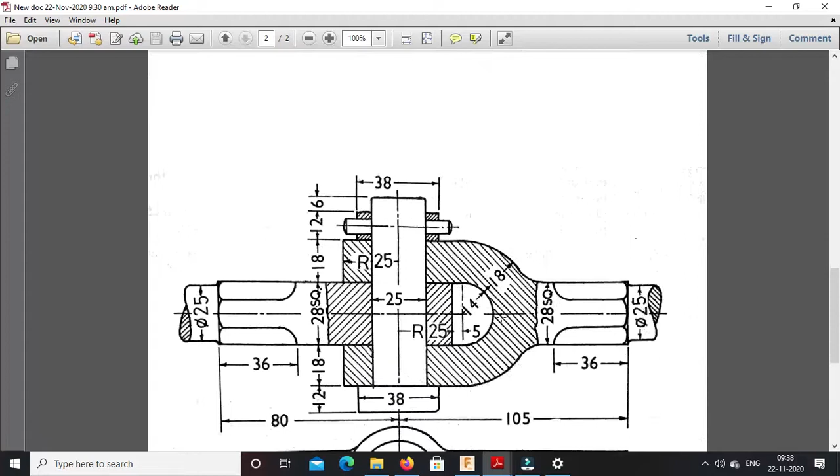Now the next part is the knuckle joint. These are the parts of the knuckle joint. Three-dimensional parts are there in isometric view, and this one is the assembly. So for what purpose is this knuckle joint used? Whenever two rods are having axial load along them and you want to connect them together, this kind of knuckle joint can be used.

This is one end of the shaft, called the fork end. This one is the other end of the shaft or rod, called the eye end. If we want to connect these two ends together, we insert this eye end in between the fork end, then insert this pin through the common hole, and then we lock this pin using this collar and pin arrangement.

We will insert first the collar over here, and then we will insert this taper pin through the common hole provided in the collar and pin. So the final assembly will look like this. This is the sectional front view and this is the top view of the assembly.

Now the advantage is that whenever we join two ends of the rod using this knuckle joint, angular movement is possible. That means if this rod is fixed, this rod along with the joint can move in an angular motion. If you observe a tractor, the engine or front part of the tractor is joined with the back side, called the trolley, and to connect them this kind of knuckle joint is used.

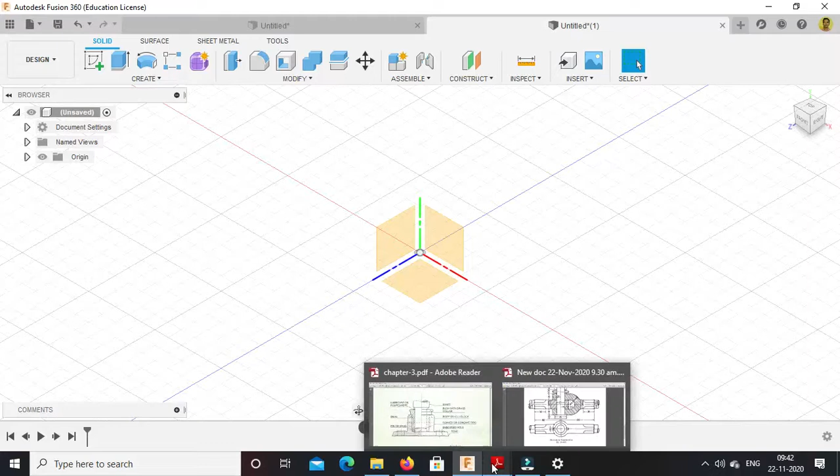First we will go to Fusion 360 and try to make the same orientation as the drawing. On the horizontal plane, we will draw this cross section, these two circles and thickness, and then extrude it. So go to Fusion 360, select this horizontal plane, and create sketch.

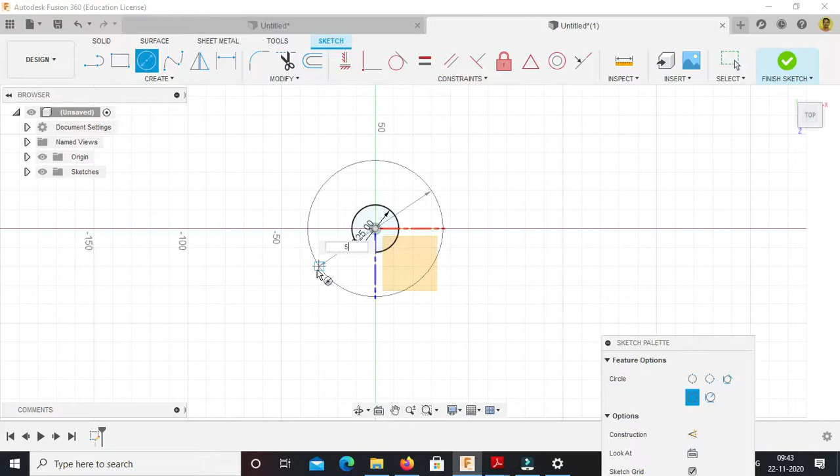Now we will draw two circles, first of diameter 25, enter, then radius 25, that means diameter is 50. Press enter. Correct. So this central circle is 25 and this R25, that means diameter is 50.

Okay, and then we need to draw this line, that means square. So this is the square, so we will draw two lines for 28 square.

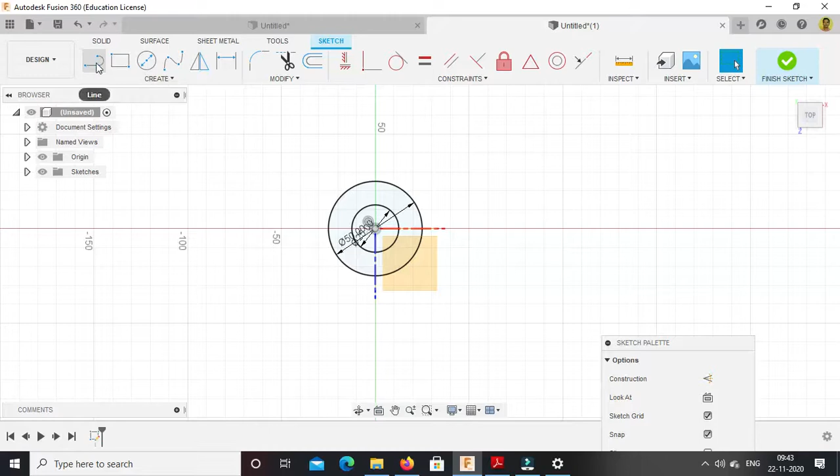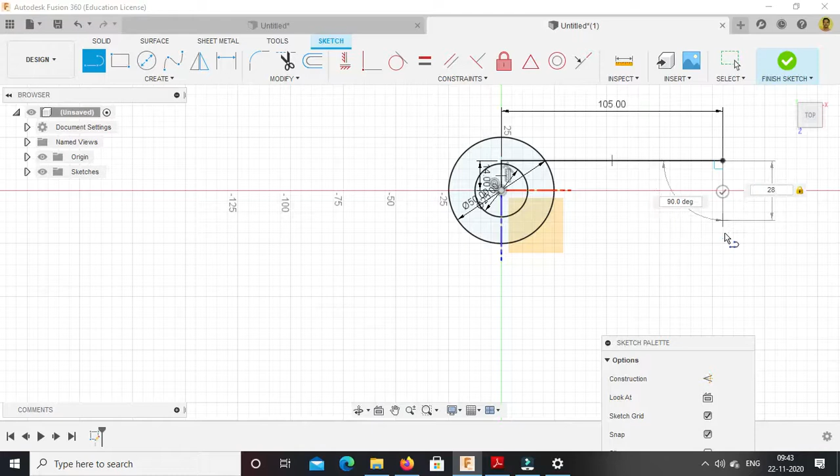So just take line command, start from this side, go to this 14, enter, then length is 105. If you remember, I have already shown you 105, then again 28, and then again we will come back to original position.

Now we will trim this remaining part. This is not required, this is also not required, this portion is also not required, and this is not required. Okay, finish this sketch.

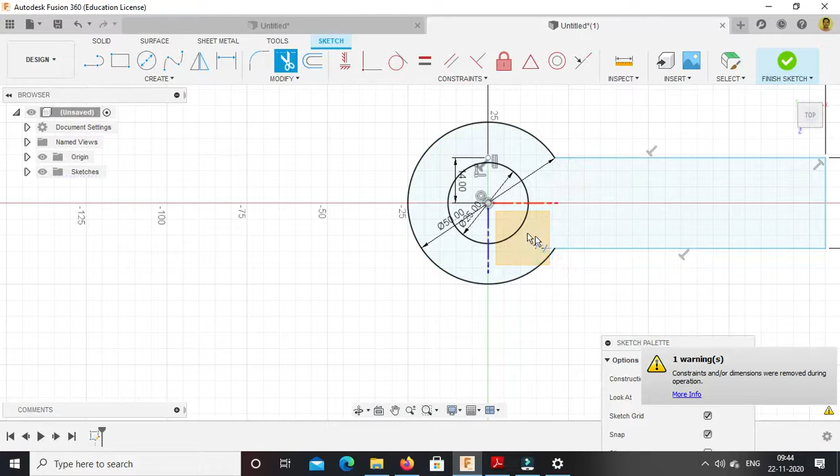Now this cross section we have drawn. Now for extruding, what is the total height of this part for this fork end? So from this point to this point. This 18 plus 18, so it is 36, and 36 plus 28. So it is total 64.

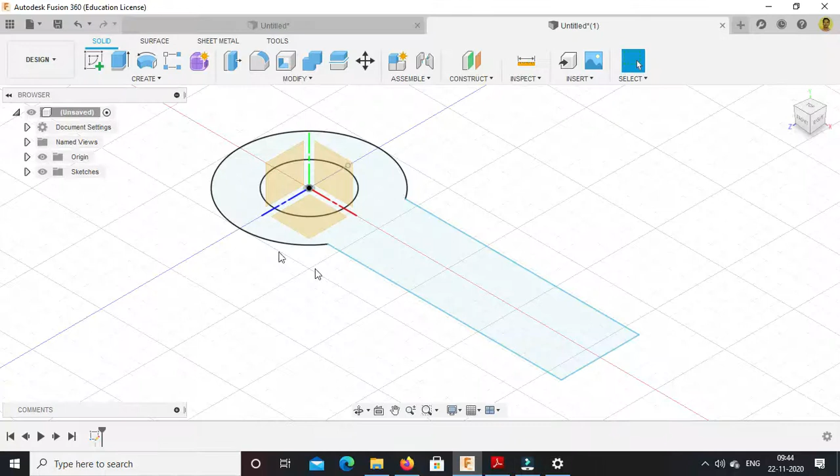So we will extrude it by 64 distance. Extrude, select this, enter the distance as 64, press enter. Now first of all we will remove this extra material over here because we want this end to be of 28 square only.

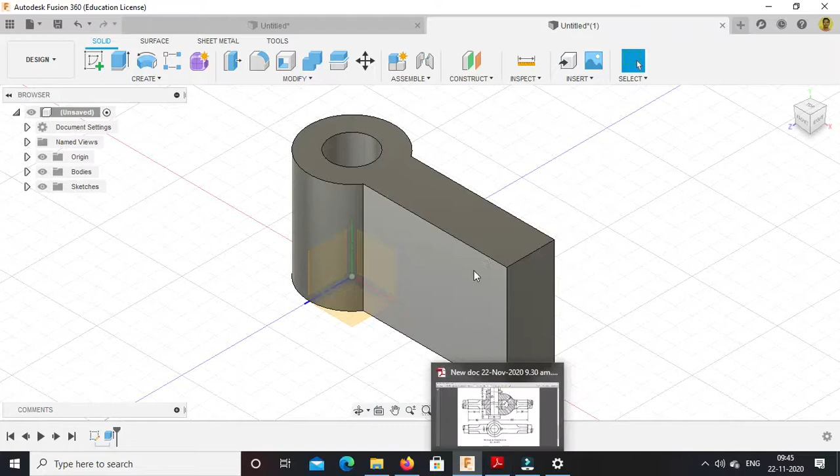So we need to select this plane, right click on it, go to create sketch option. Now how the cross section is, this is the circular portion.

So here it is a circular portion, and how the center is located, this 25 plus 5. So total from this center it is at 30. And this 14 plus 18, so how much is the radius? 18 plus 14 is 32.

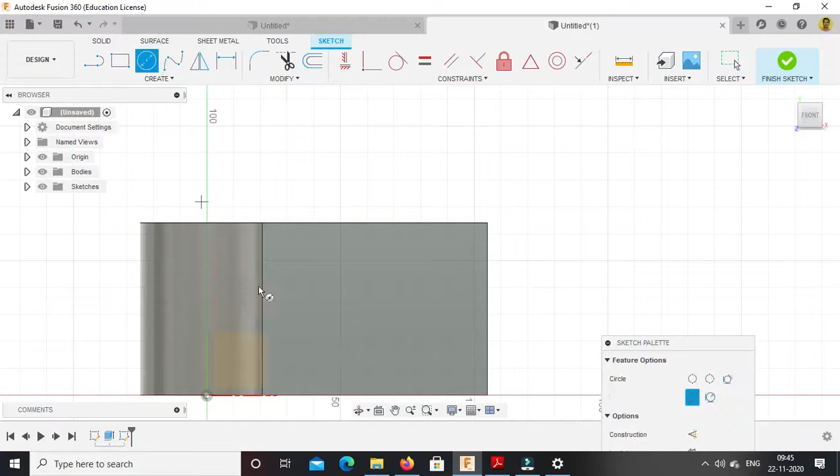So diameter is 64. So at the distance of, from this center, at the distance of 30, we will draw one circle of diameter 64. And then we will draw this center line. So again go to this, just draw one circle over here of diameter 64,

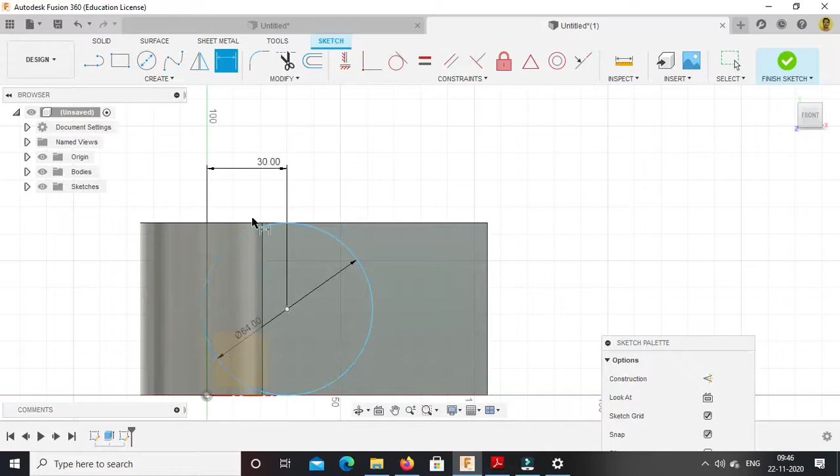Press enter. Now we will dimension from this center point to this, it should be 30, exactly 30, press enter. And we will check it whether it is symmetric or not. This should be 32, so it is 32.

Okay, now we will draw again lines from this point to 14, then we will go like this, again 28, and then we will come back to position.

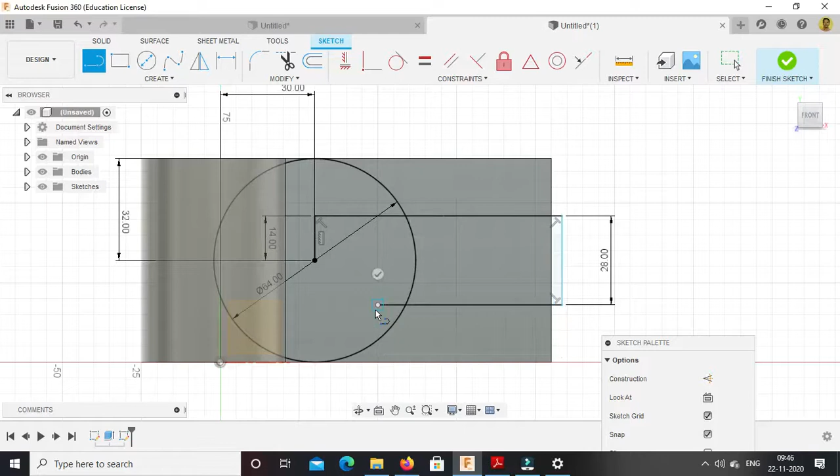Again using trim command we will remove the in between part. Now finish this sketch mode, finish the sketch mode. Now we want to remove this material.

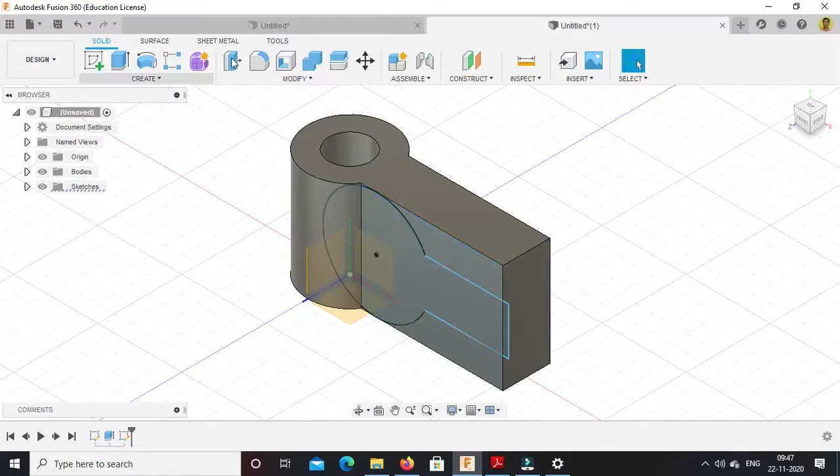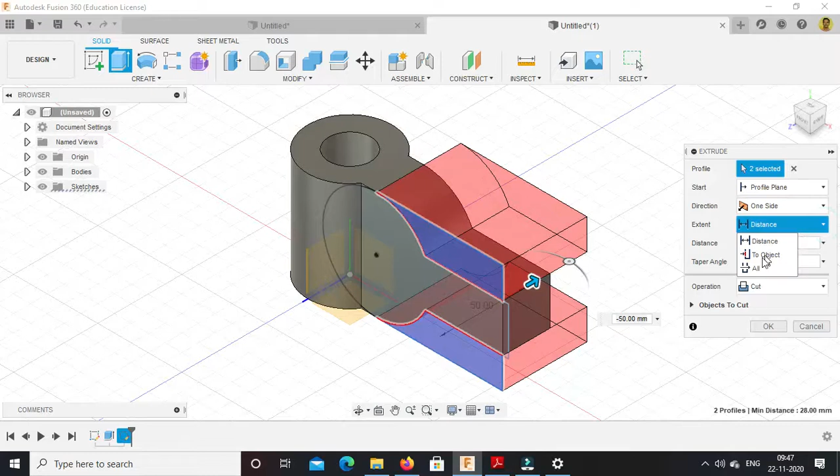So this part, so go to again extrude, select this one and this one, make operation as a cut because we want to remove the material. The direction should be, again keep it as it is, and distance should be all. So it will remove the material, press OK.

So we have got this. Now we want to remove the central material, so for that purpose just go to center plane, this plane we will select, right click on it, go to create sketch option.

Now for preparing this part, what is required, how are the dimensions? So this thickness is 28, for which we want to remove the material. First of all we want to draw one rectangle of this 25, plus 5, so 30 is there. And on this side also we will keep it as 30. Then height is 28 and this half circle of the radius 14. And it should be at the center.

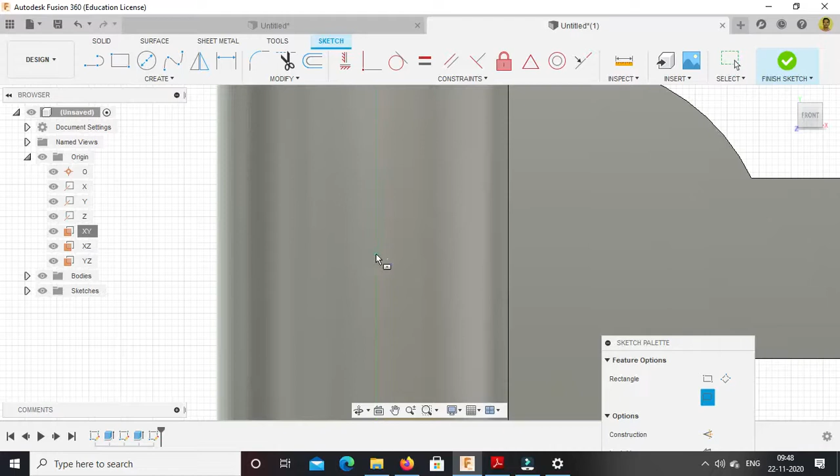So for that purpose just go to it, draw a center rectangle, center rectangle. Just give the height as 28, press tab, width should be 60,

Press enter. Then again we will keep it at the center. So from this center distance should be 32 because total height is 64. Press enter, and already we have drawn it at the center, so no need to measure from this point to this point or this point to this point.

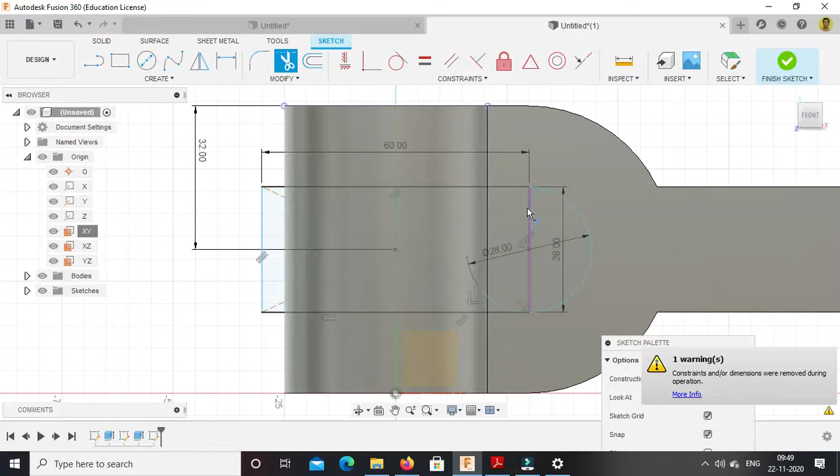So we will draw one half circle over here of diameter 28. Again we will remove the material or unwanted portion of sketch. Finish this sketch mode.

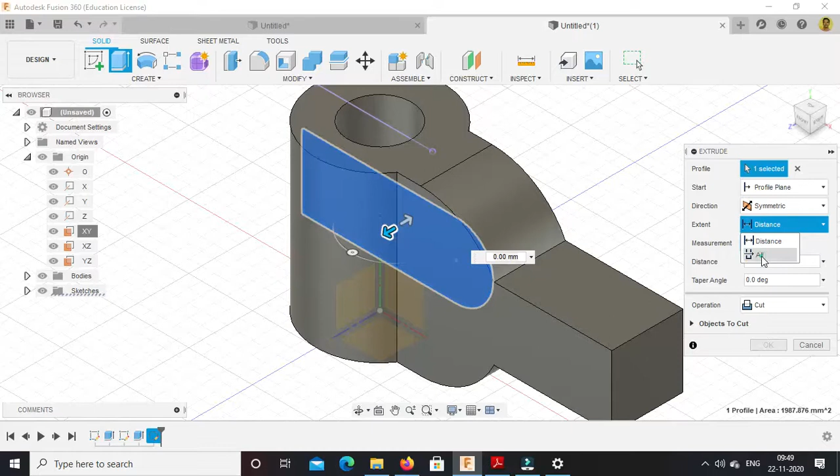Now again go to extrude, select this central part. Now this time direction should be symmetric because on both the sides we want to remove the material. Cut, and distance should be all. Press OK.

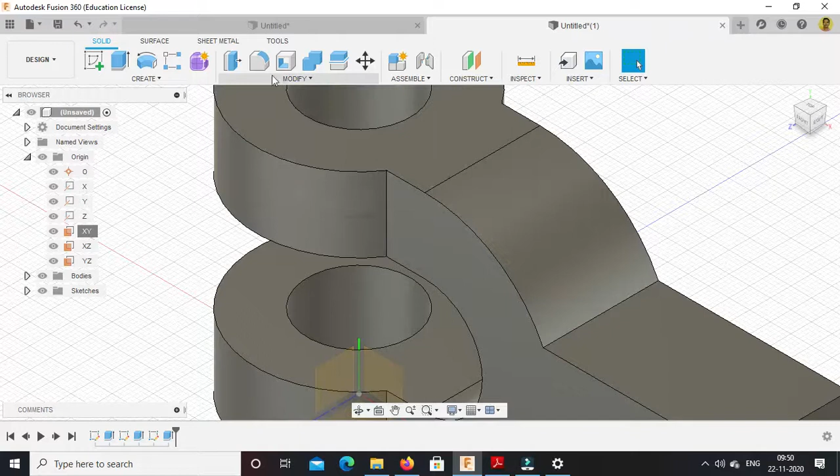So we have prepared this part. If you observe, similar to the initial one. Just for rounding purpose we will provide fillet over here because these edges are sharp. So for that purpose go to fillet, select these edges. First of all we will select all the edges that we want to fillet.

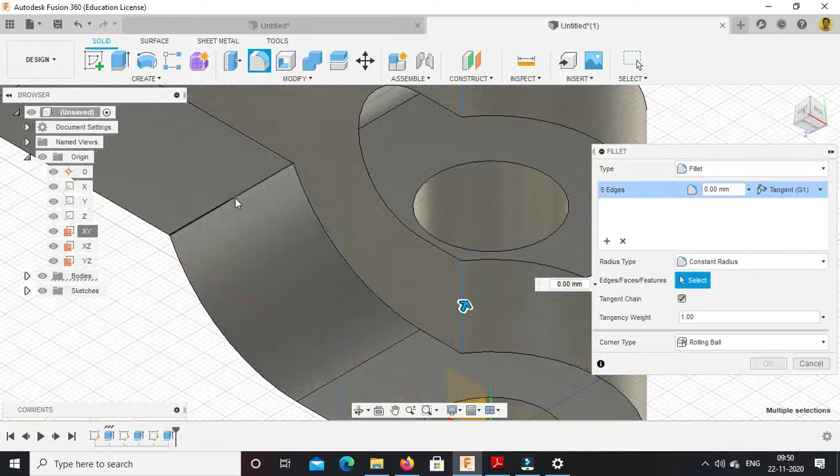One more edge is remaining on the bottom side. The dimension for this fillet is not given in the assembly, so we will give it an approximate 4 mm. Press OK.

Now this one is nothing but the 25 square. Here you are observing 3 faces, so it is nothing but 8 faces he is having: 3 faces on the upper side, similar 3 faces on the bottom side, and on the side one face will be having. So it is not hexagonal, it is octagonal.

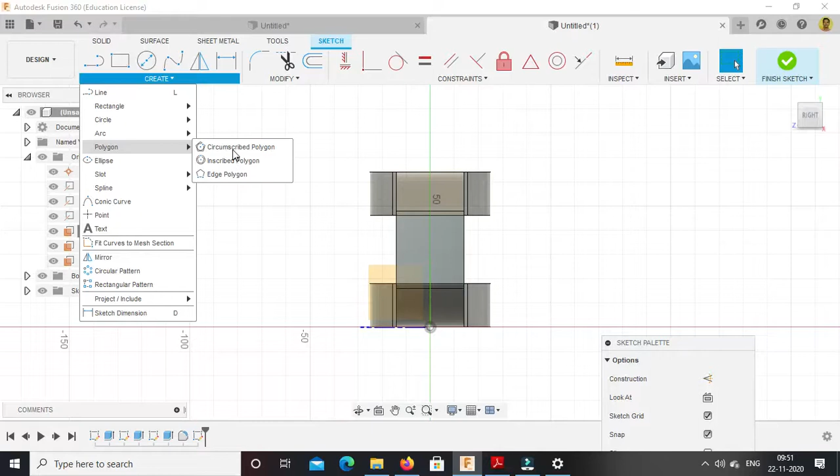We will try to prepare it. Just go to this face, create sketch, go to polygon option, place the center, and enter the number of sides as 8. Press over here, so this is having 8.

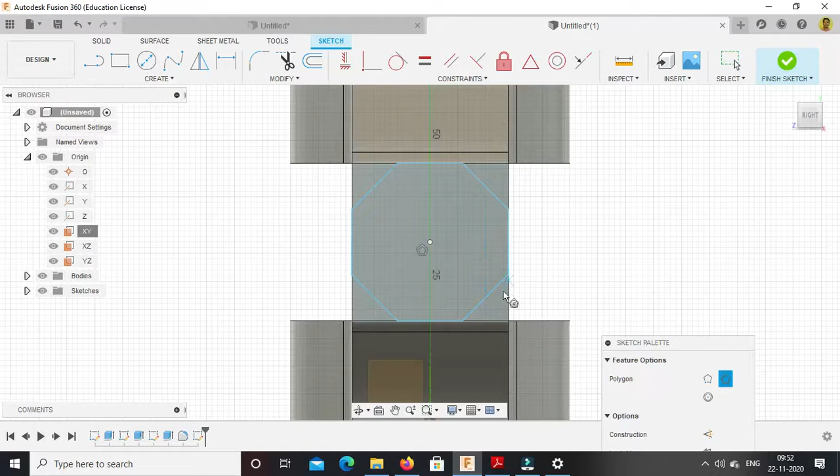These 3 faces, then these 2 faces, and these 2 faces. Finish this sketch mode. Now using extrude again.

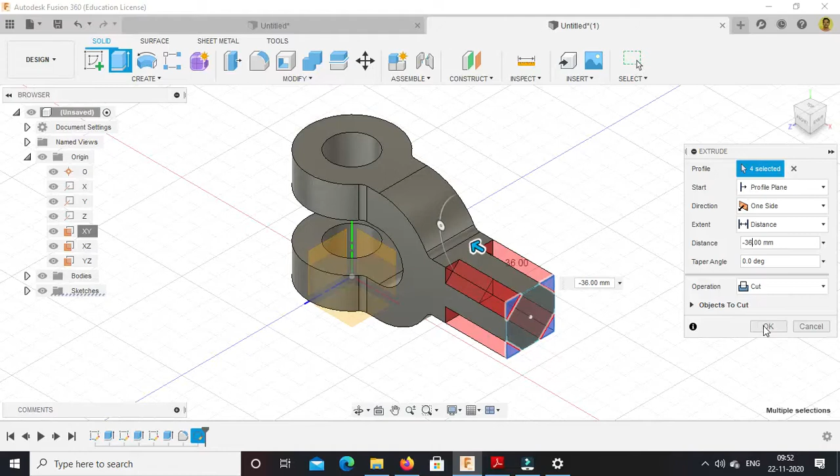This, and this. For how much is the distance? For 36, that is cut. So for 36 we'll make it as a cut. Distance should be minus 36. Press OK. So this is, if you observe from the top view, similar 3 faces you will observe.

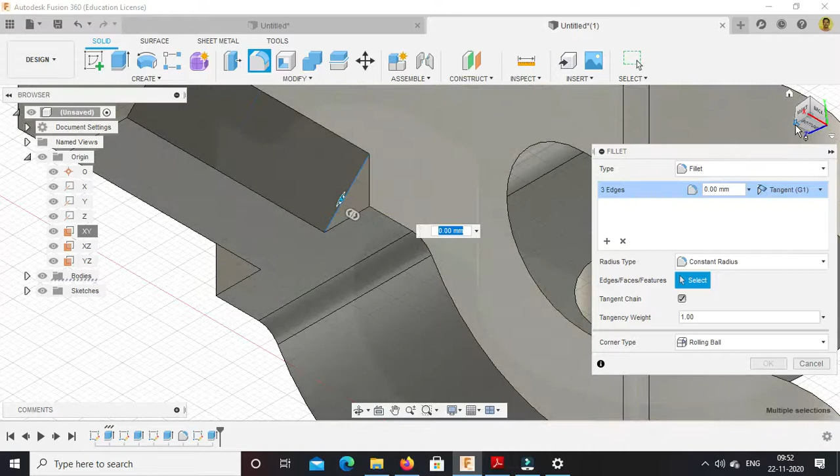Again you can provide fillet over here, set radius as 4, let us suppose. Press OK.

So with this we have prepared this. If you want to provide a circle also here, it is not required, just generally this is a very minute detail, but we will provide it 25 circle and let us suppose 15 mm as a length.

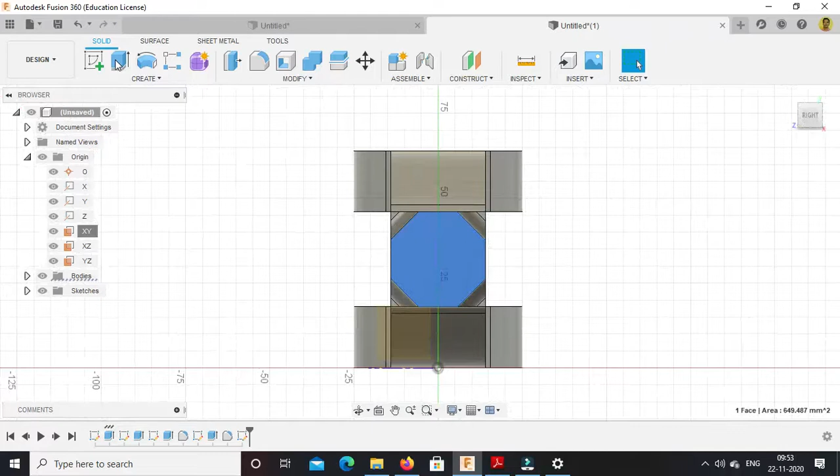Again go to this, create sketch, draw one circle, 25. It is not exactly at the center, you can adjust that, press enter.

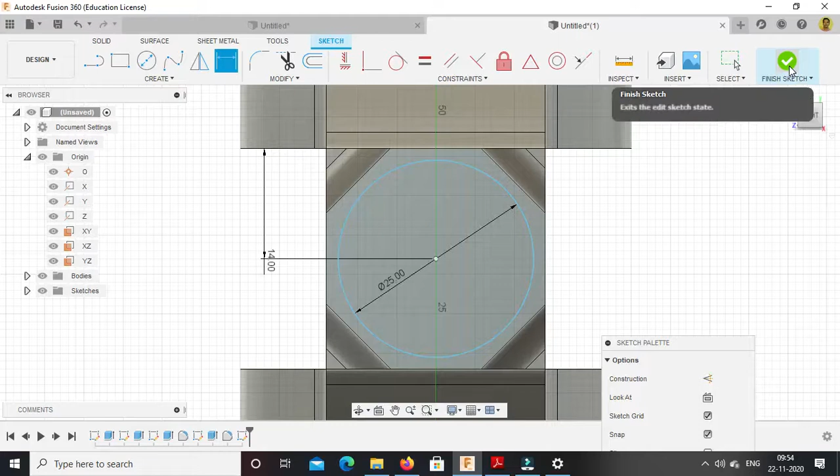This should be 14 because it is now exactly at center, sorry, finish the sketch mode. Again go to extrude option and enter the distance as, let us suppose 15, not 115, 15. Press OK. So this is nothing but the

pitch end, fork end of the knuckle joint. We have finished this. This is the most difficult part in this. All other parts are simple.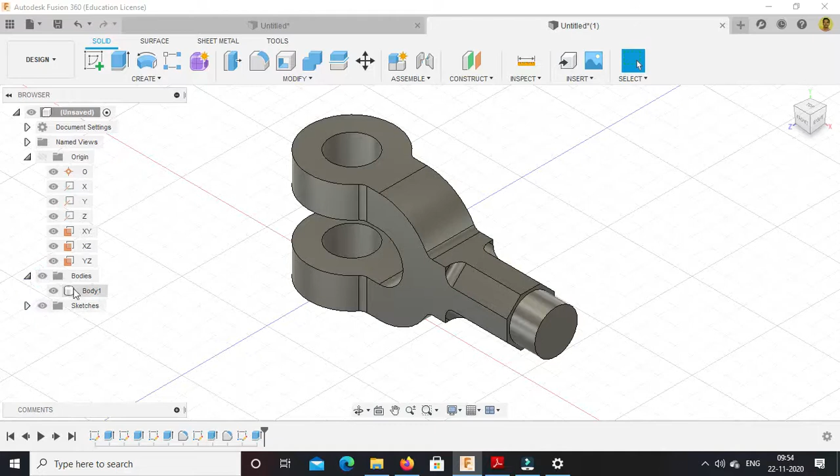So fork end. Now again for assembly purpose, just origin, you can create bodies from that. Right click on this, create bodies, sorry, create components. And you can save it. Save.

Here you can select the folder. And fork end, give the name as fork end and press save. We will open next window.

Now next part is eye end. It is very simple, only we need to draw this cross section and extrude it as we did for the fork end. Again this diameter is 25, this outer diameter is 50, and this one is a 28 square. So it is very simple.

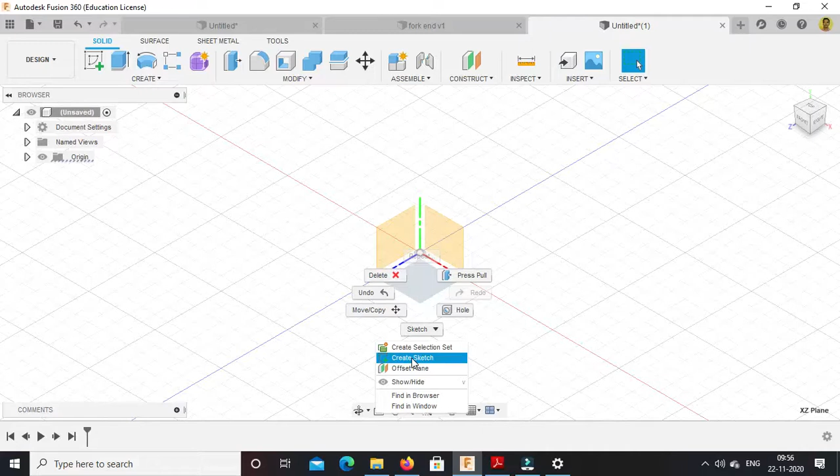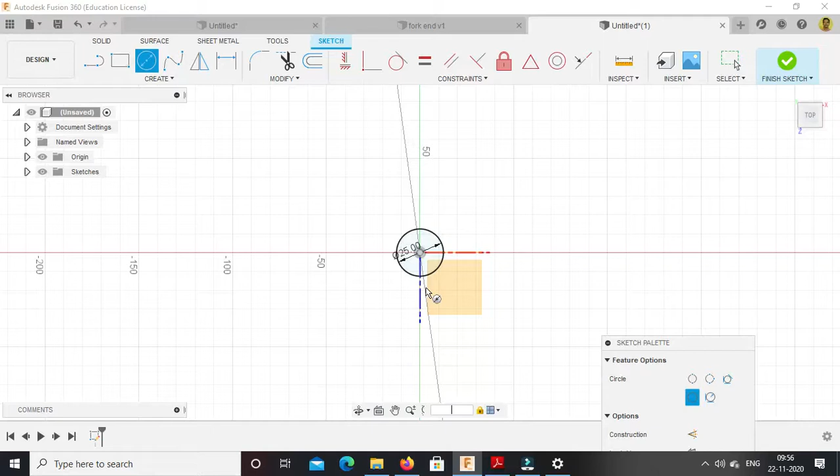So go with this 25, press enter again, 50, enter, sorry it is 504, should be 50, press enter.

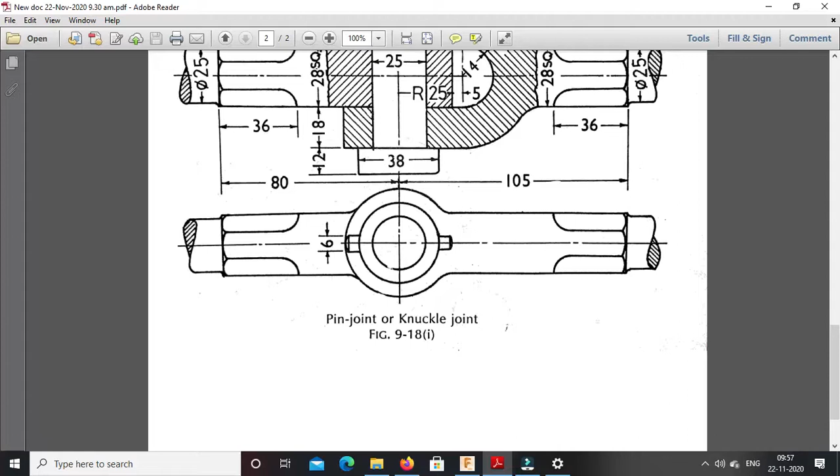Now again we want 28, so just go to line command, 14, length is how much, again on this side also 80 mm as we want, this length of the eye end 80, so enter this length as 80.

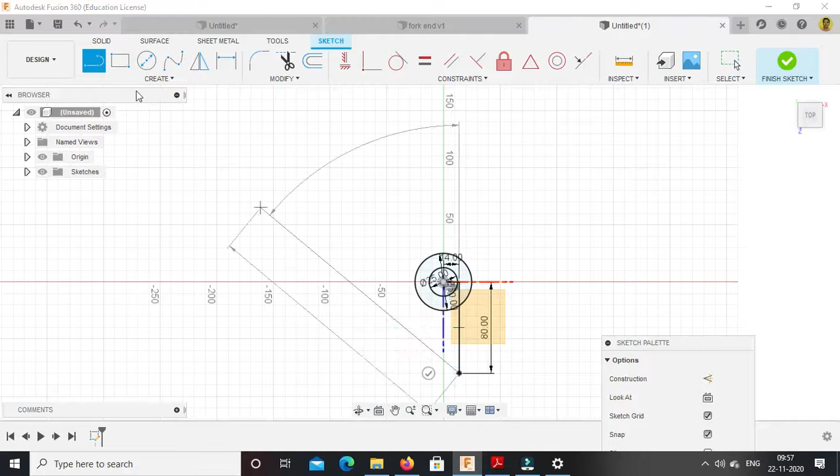Again we want it as a 28, angle we will enter manually 90.

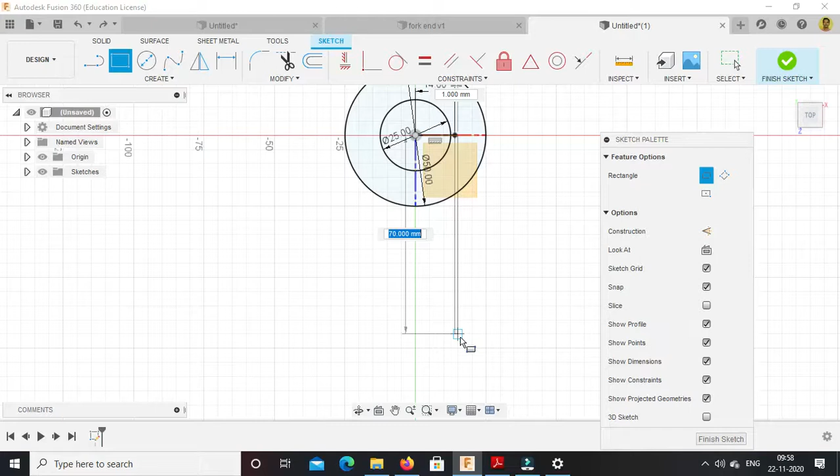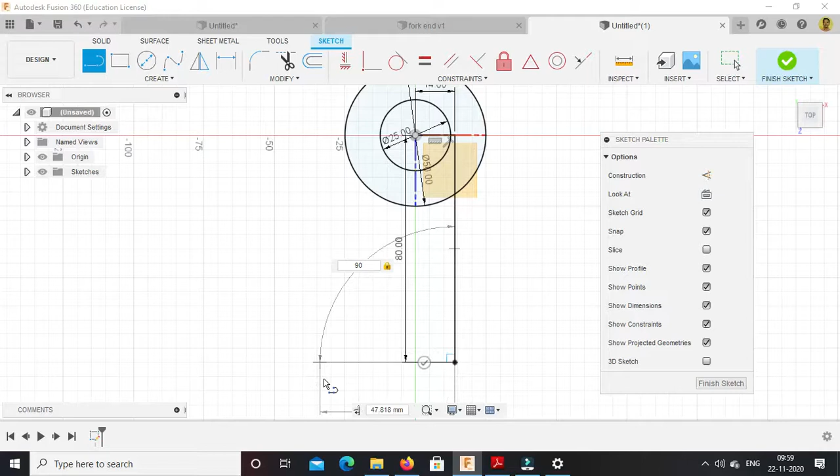Just take line command. Just simply I have taken the rectangle command. 80. Press tab, 90-degree angle. Press tab, distance is 28. Then again up to this. Finish this sketch mode.

Sorry, not finish this. Trim. Okay, finish this sketch mode now.

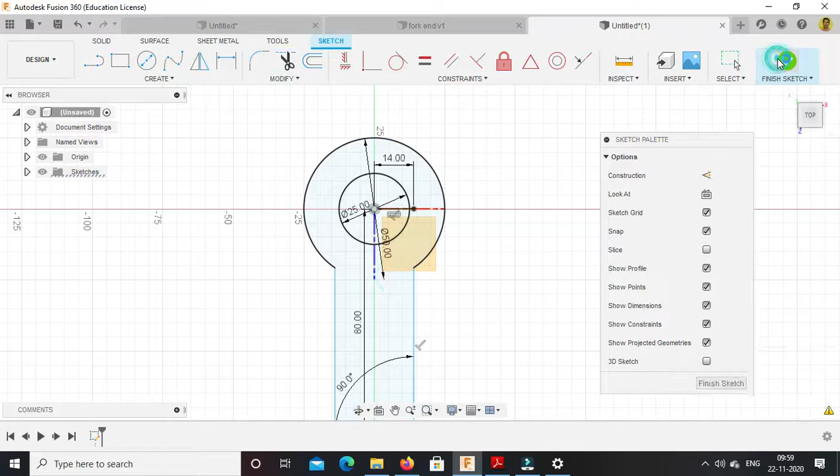Now we will extrude it by the distance. How much it is? This is 28. So distance, enter it as 28. Press enter.

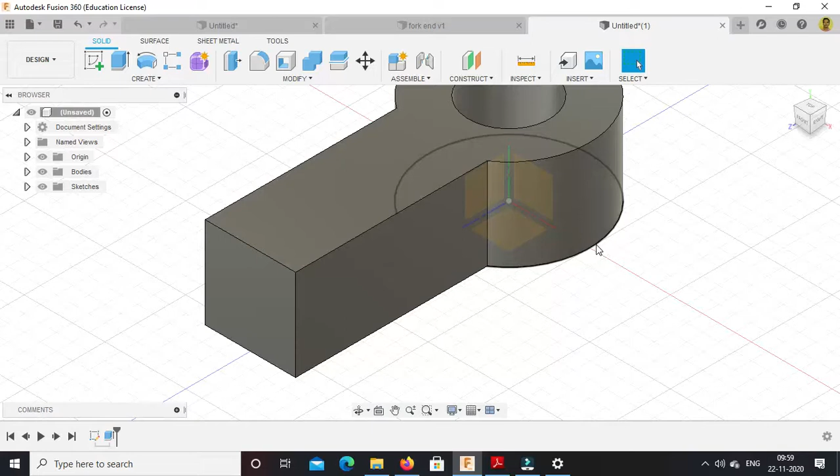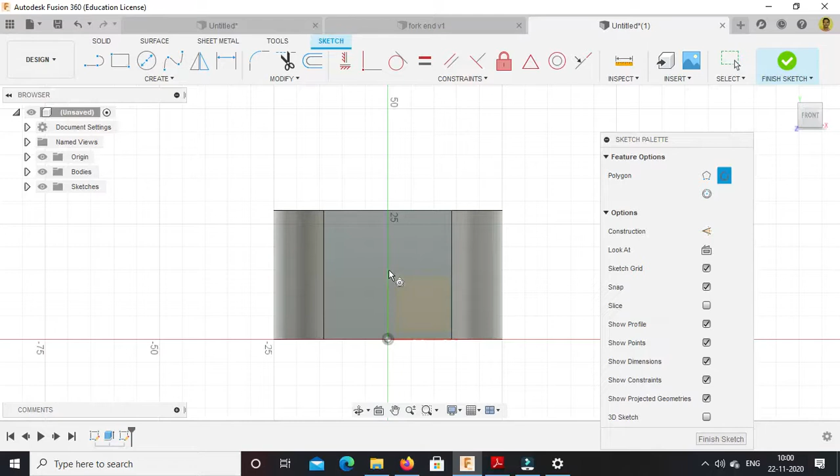Again we will provide that octagon over here. So create sketch, go to polygon option, number of sides 8.

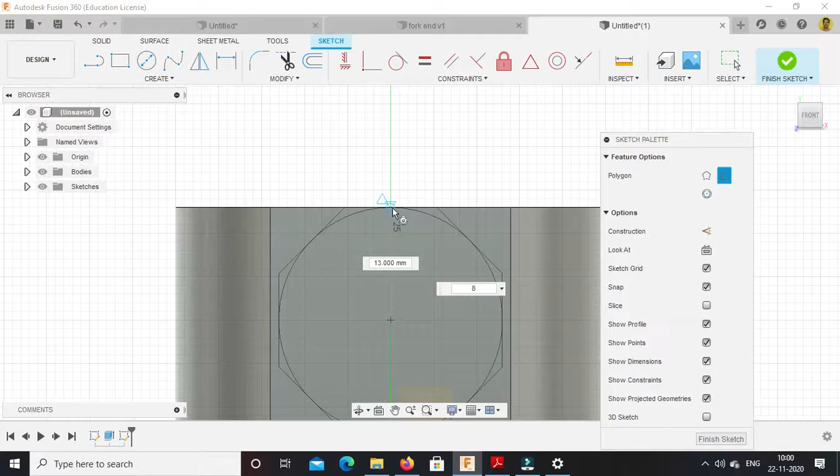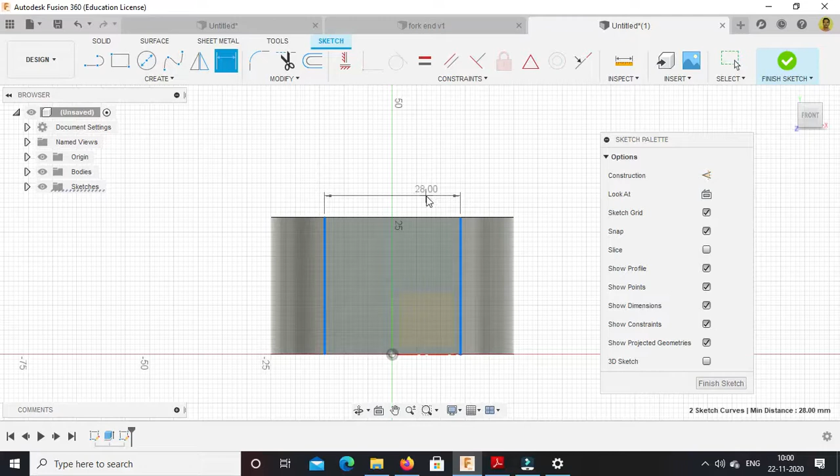Some mistake in this. I will draw polygon once again. Now it is okay. Finish the sketch mode.

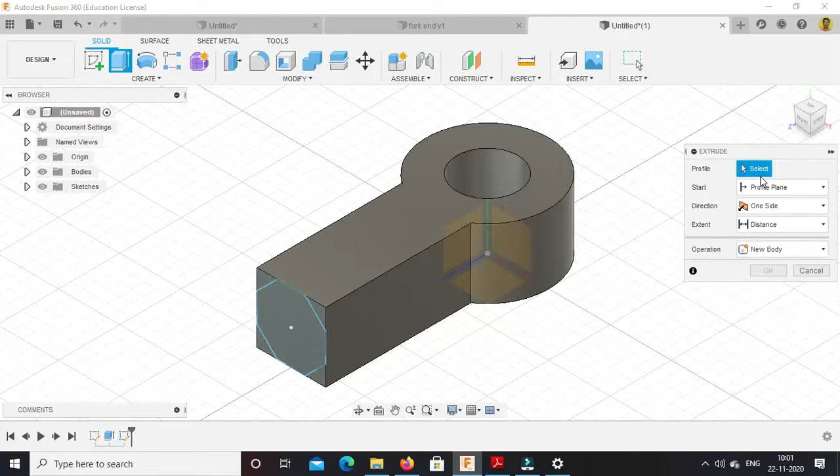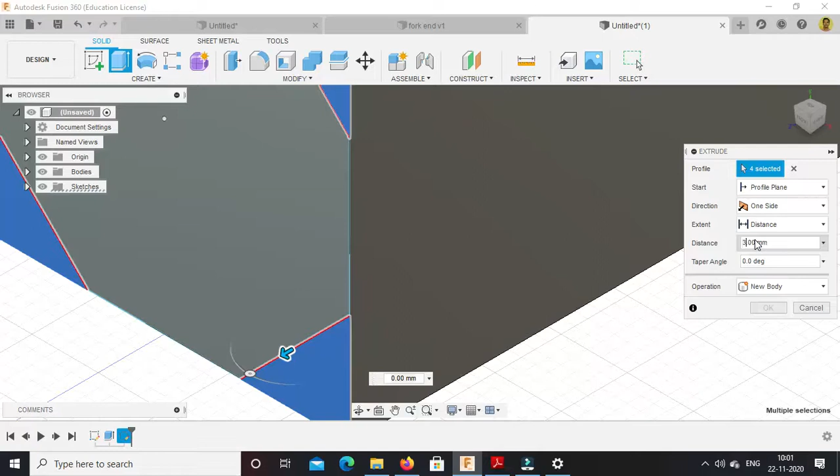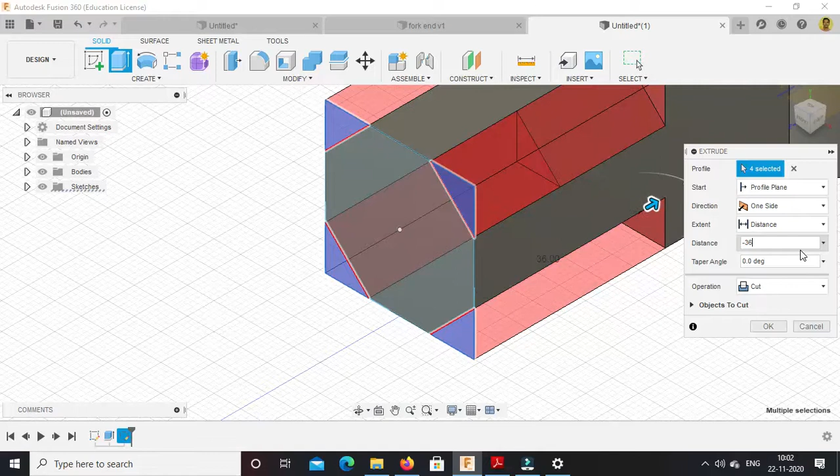Again using extrude cut. Distance is how much? From this side also 36. So enter the distance 36. Select the operation as a cut. Sorry, we want to reverse this arrow and distance should be minus 36. Press OK.

So now we will provide again circle over here. It is nothing but the end of the rod.

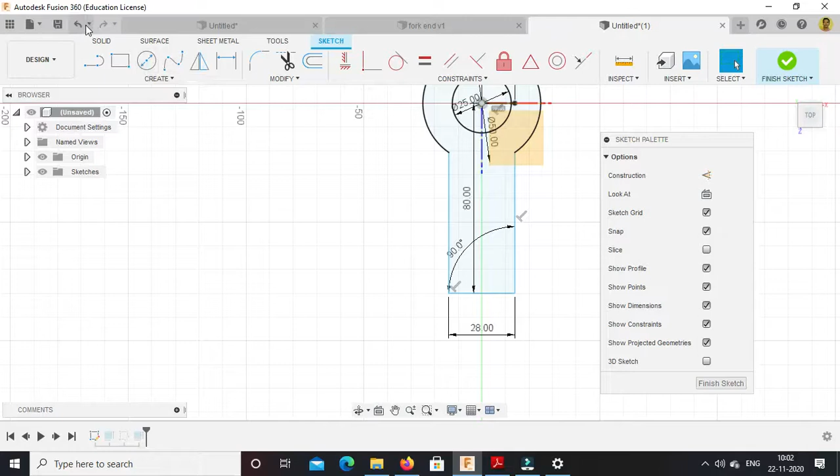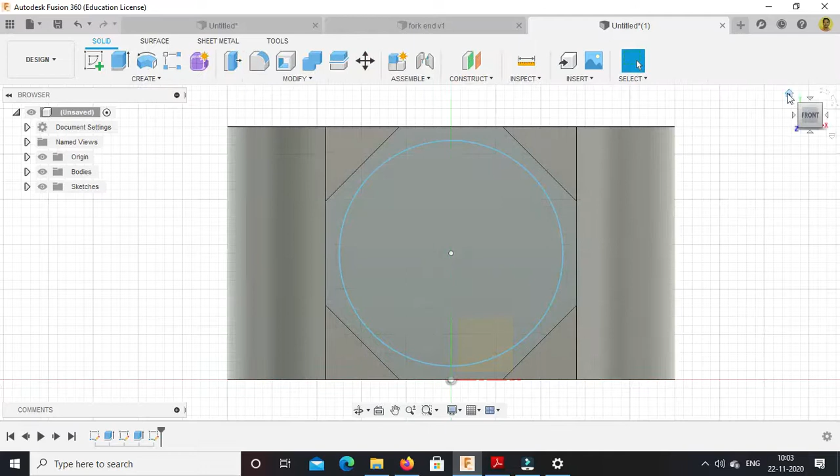I will draw one circle again over here of diameter 25, same as the previous. Press enter, finish the sketch mode. Extrude, select this center point, drag it to 15 mm, press OK. And we will provide fillet over here.

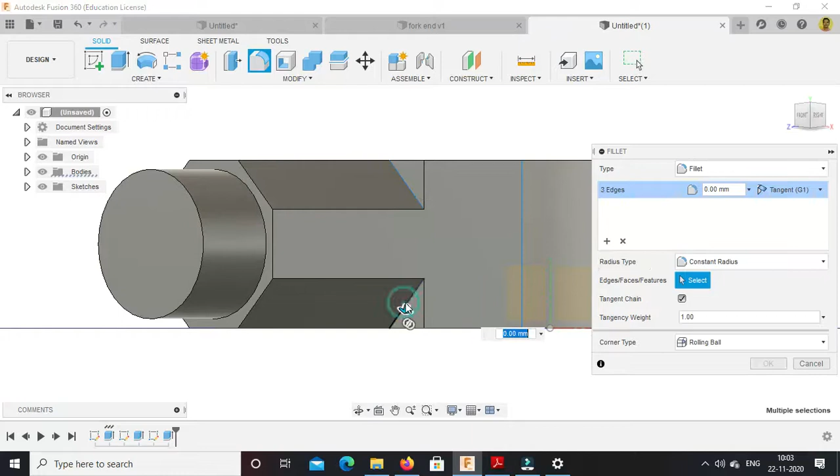Go to fillet, select these edges, we select these two edges also, this edge, and one more is remaining at the bottom. We will enter the radius of fillet as 4 mm.

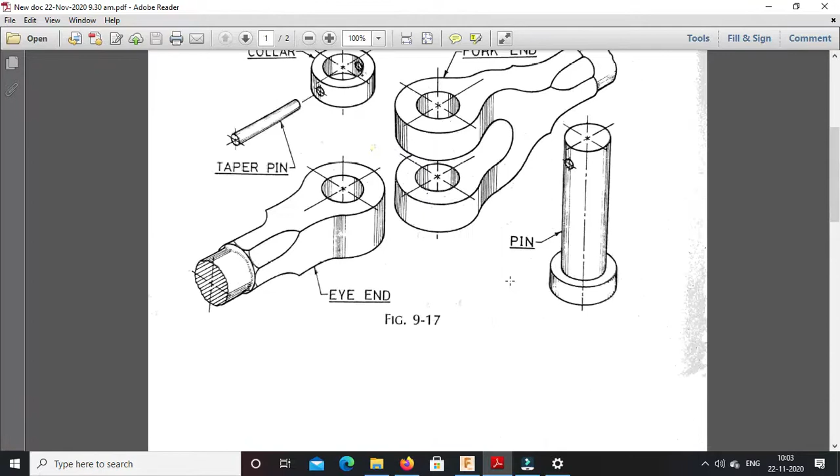So this is nothing but our eye end. Okay, this is nothing but the fillet provided. Now next part which is remaining is pin, collar and taper pin. So we will go for the pin. You can again save this component using convert into component and then save it. I will not go into that again, it is same procedure as per the previous.

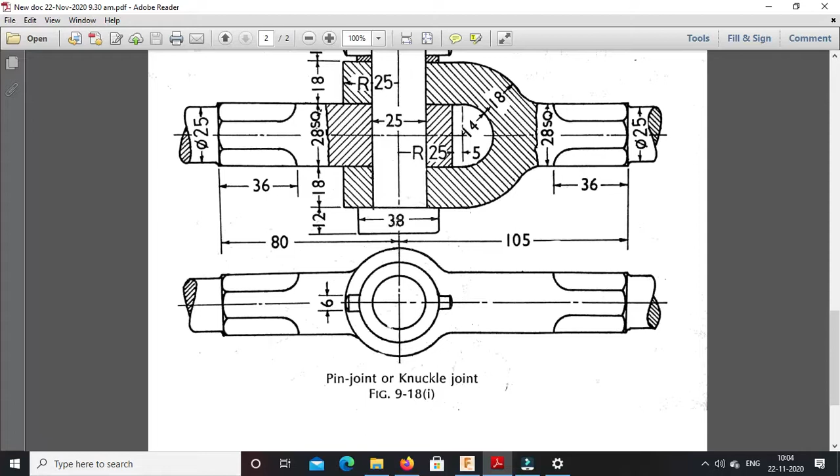Now we want the pin, we will find out dimensions for it. This pin head is 38 mm diameter, thickness of the head is 12 mm, then 25 is the central position, then this 64, then this 12. So 18 plus 28 plus 18 is 64, plus 12 is 76. 76 plus the extra end required, that is 6, so finally it is 76 plus 6 is 82. So 38 by 12, and 25 by 82, total length of the pin.

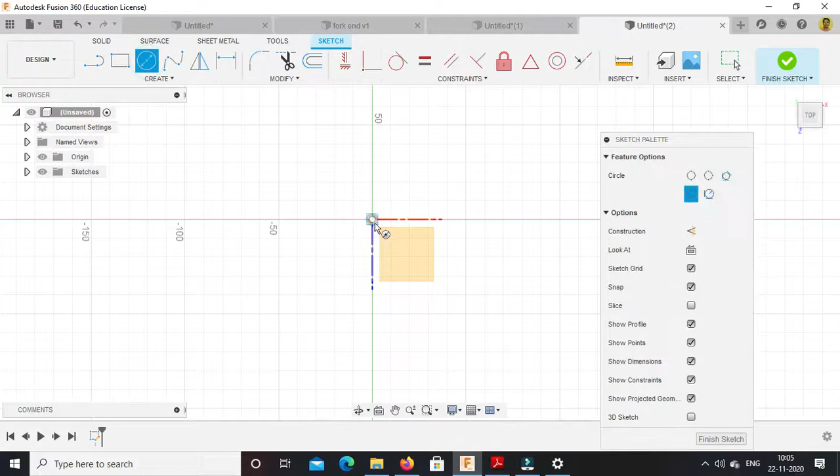So again go horizontal, create sketch, draw one circle, not 25 but 38 diameter, press enter, finish sketch, extrude it by 12, press enter. This is 12, then 25 by 82. So 18 plus 28 plus 18 plus 12 plus 6, so 82 mm is the height for the pin.

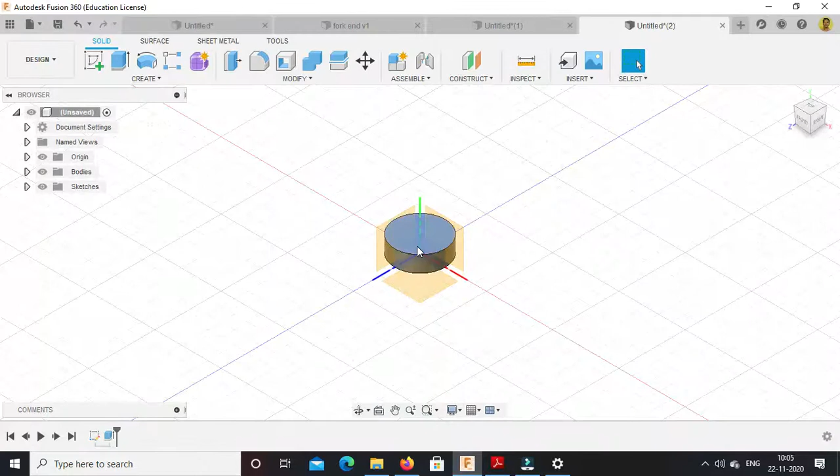Again go to this face, create sketch option, circle, center diameter circle, diameter should be 25, press enter, finish this sketch mode, extrude it by distance of 82, press enter.

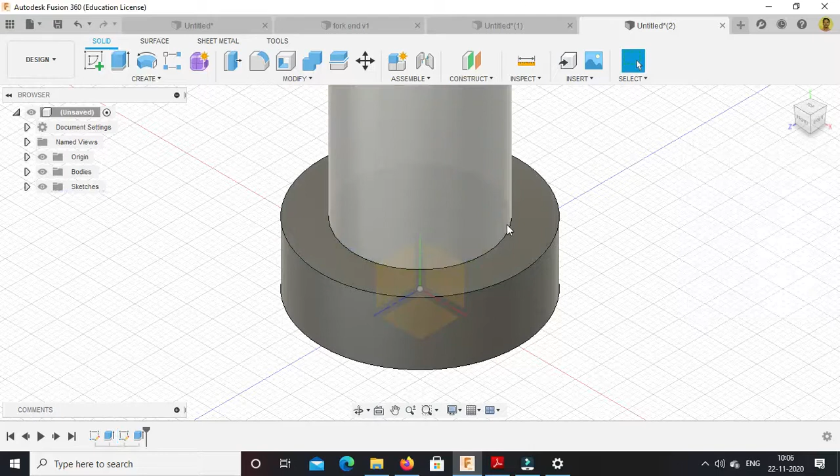Now we want to drill one hole in this pin. So this is at a distance of how much?

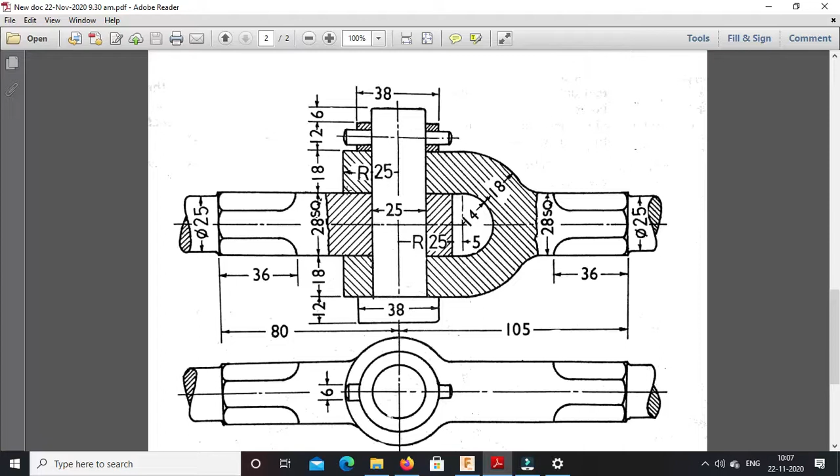This 12 plus 18 is 30, then 30 plus 28 is 58, 58 plus 18 is 76, 76 plus 12, but we want this hole for the pin at the half distance. So this much, 76 plus 6 is 82. So starting from this point at the distance of 82, we need to drill a hole for this taper pin dimension.

It is 6, diameter is 6 for that pin. Now select this plane, create sketch option, just draw one circle of diameter 6 mm along the axis, enter. Now give the dimensions from this point to the center of this circle, it should be 82, press enter.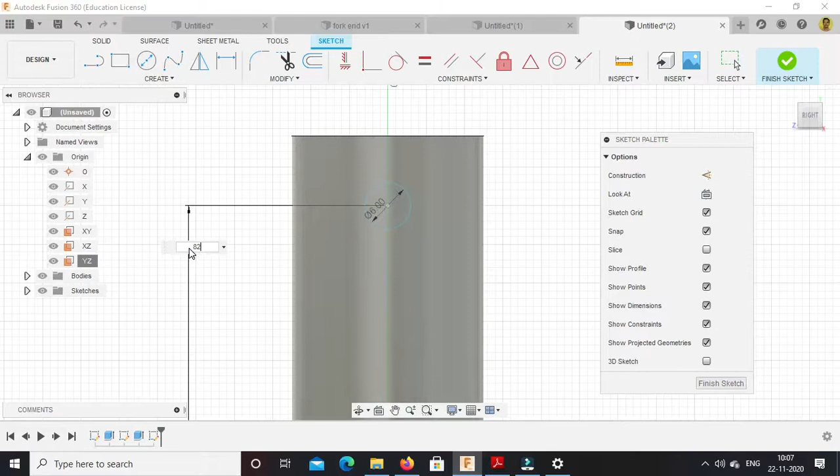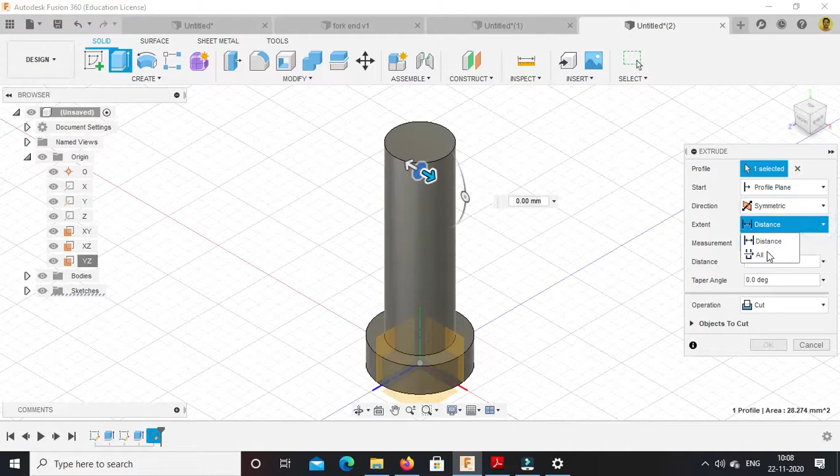Finish this sketch mode, extrude option, direction should be symmetric, operation should be cut, and distance should be all. So like this we have created this hole inside the pin. So with this we have finished this third part also, that is nothing but the pin.

You can again save it, make the visibility of origin off and save it.

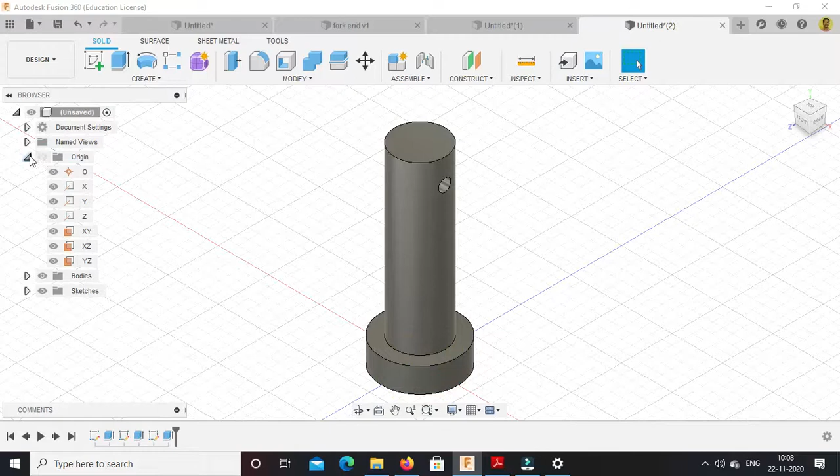Now next one is collar. So this part is collar. For dimensions, 38 is the outside diameter, inside diameter is 25, this thickness is 12, and again at the center position we want to drill a hole of diameter 6 mm for the taper pin, throughout the collar. So 38 outside diameter, 25 inside diameter, and thickness 12.

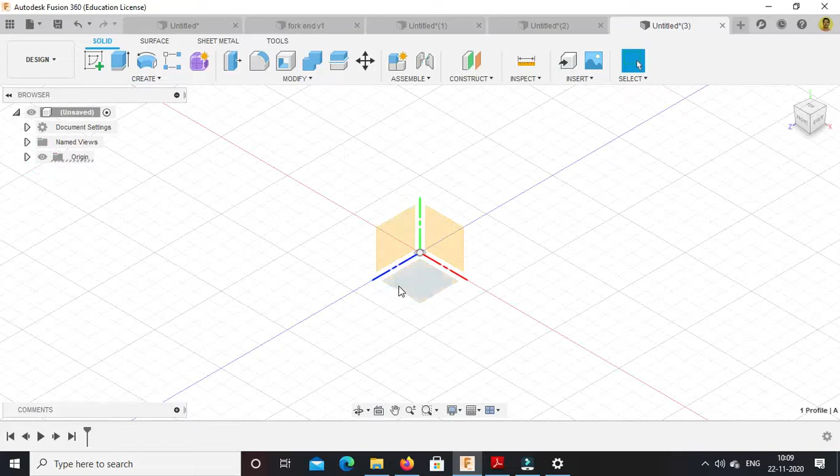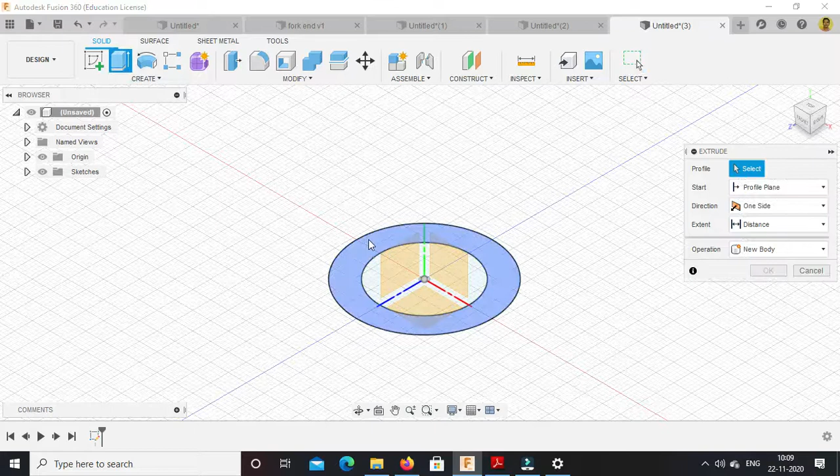So again go to horizontal plane, create sketch, circle, 25, enter, circle, 38, enter, finish the sketch mode, extrude, it should be 12.

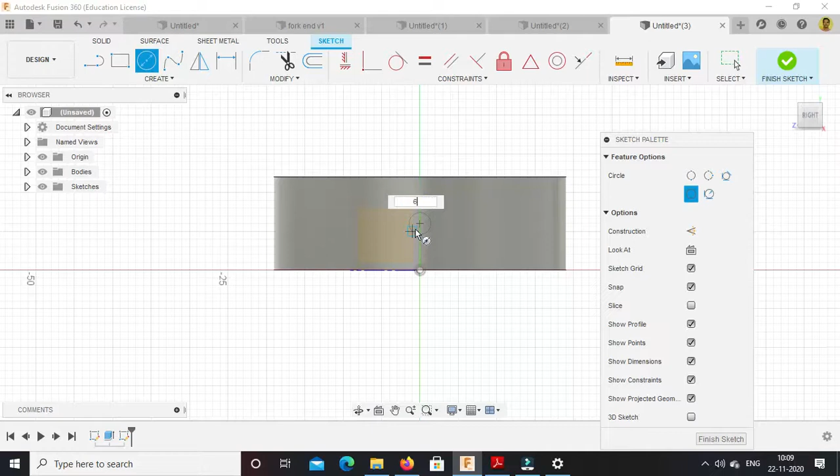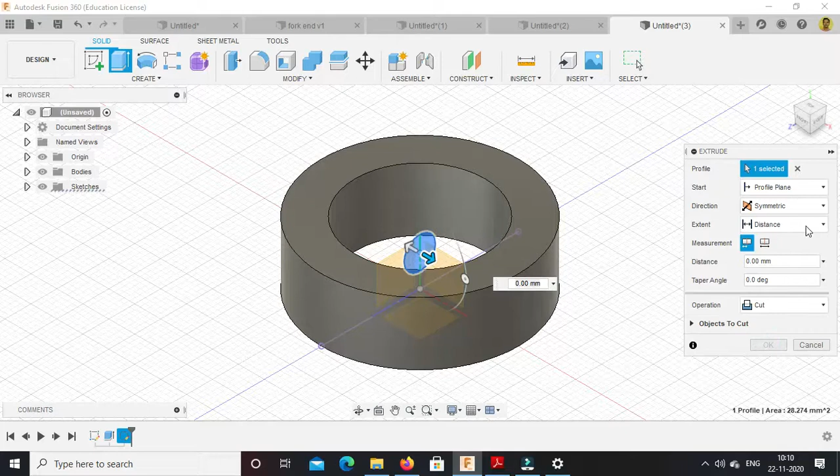Press OK, select this plane, go to create sketch, circle, 6 mm diameter, press enter. Now again we will check whether it is at the center or not, this should be 6, so it is at the center. Exit the sketch mode. Now extrude cut, so direction should be symmetric, operation should be cut, and distance should be all. Press OK.

So this is nothing but the collar. Now again we can convert it into component and save it.

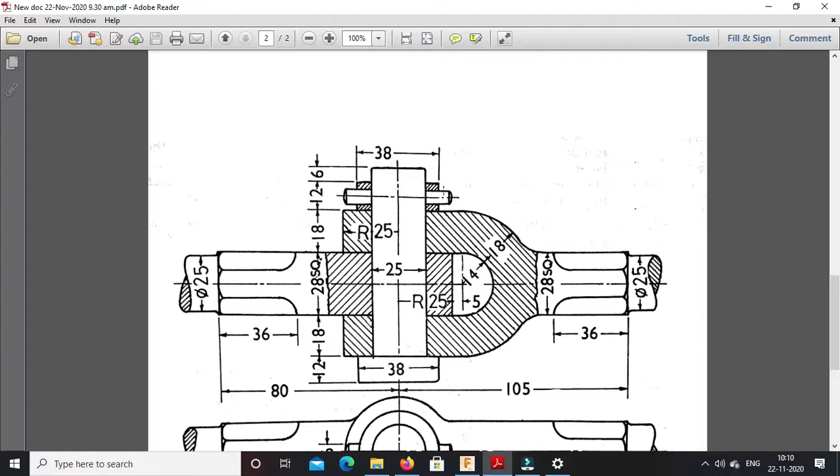Final part which is remaining is nothing but the taper pin. So taper pin is simple. This diameter is 38... outside diameter is 38, length of the pin is not given, so we will assume 5 mm extra on both the sides. So 38 plus 5 mm on this side and 5 mm on this side, so it is 48 and diameter is 6.

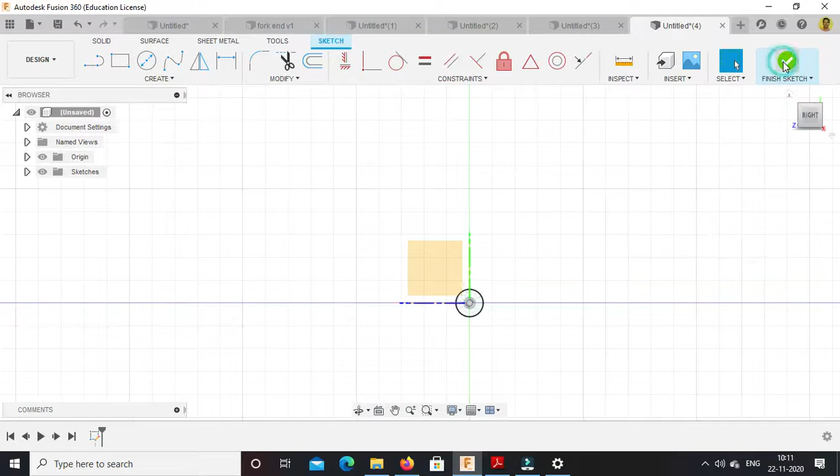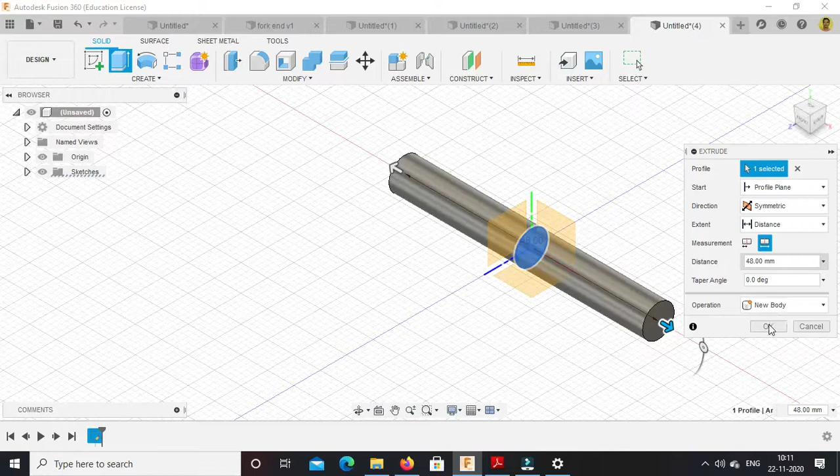Create sketch, as per the orientation I have selected the plane. Go to create sketch, diameter 6 mm, press enter, finish the sketch mode. Only you need to extrude it, symmetric, distance should be symmetric and total distance should be 48. We will not provide taper here for simplicity. And so this is nothing but the pin.

So we have created all the components: fork end, then this eye end, then pin is there, this much is the collar, and again this is the pin. So we will assemble all these components in the next video. Thank you.